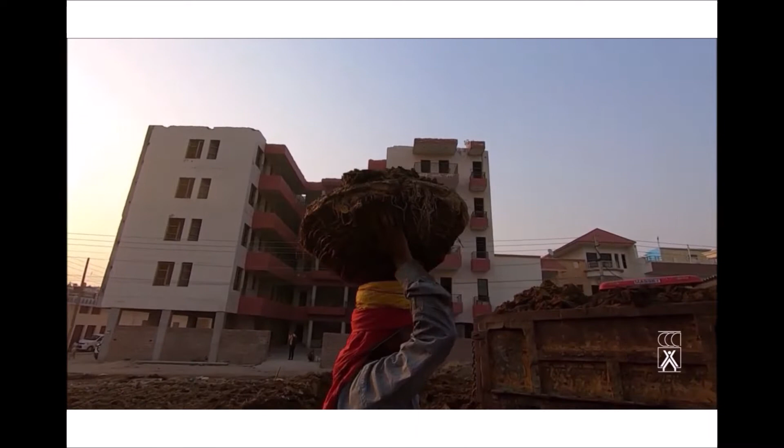One of the various dairy farms in the village. People indulge in various commercial activities. A very prominent cow dung collection area. Cow dung is considered very sacred and used for both cooking and construction purposes.

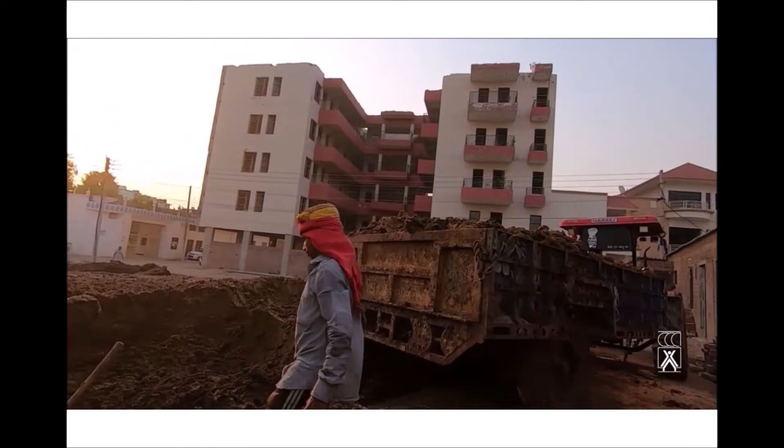We can see the movement across the road, the use of the office courtyard for recreation activities by the children, the local street hawker, right across the pedestrian area, and below the old banyan tree.

Village internal street, we can see the condition of the houses, the movement of the two-wheelers, the pedestrian movement, and the frontage and the projection of the buildings.

One of the laborer settlements, completely temporary construction, and in a very dilapidated condition. The contrast of kacha construction. I'm finding it to be very dense.

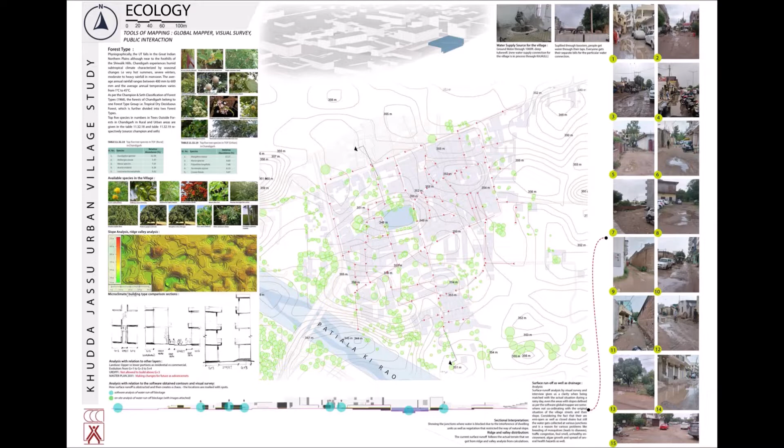Coming on to the history and the evolution of the village. Its name, Khudda, is derived from its terrain, and Jassu is named after the founding lady Jasso, who was quarantined away from the village due to a serious illness during a pandemic in those times. In that period, she cured herself and made a new village which came to be known by her name, that is Khudda Jassu. Since earlier times, Khudda Jassu had a well that was part of a garden made by the Raja of Manimajra, like we saw in the video.

Then is the Nagar Kheda as Shiv Roop for worship and a pond for domestic animals. Coming on to the evolution, first is the establishment of the core. The village started developing along the well, Nagar Kheda and the Anganwadi in the initial stages. The first settlers were the Dhaliwals from the Jat community and their main occupation was agriculture. Then is the second, in 1960, the expansion of the core.

Further settlers were Brahmins, mostly from the regions of Himachal and Punjab, who were Sharmas. Their main occupation was shops and priesthood for different rituals. The expansion reached the established core for the first time after the Brahmins settled as villagers. Then is the second phase of the expansion of the core in the 1980s.

The final main settlers were the Nais, who worked as laborers on the farms or as assistants to the Brahmins. They settled mainly on the Firni or the outer fringes of the village. In the current scenario of the village, one can observe the Lal Dora area is densely built up and therefore hardly has any chance of further development unless it is vertical. Therefore the spillover development is on the fringes and in an organic manner whilst maintaining a coarse texture. We can see the evolution from 2000 to 2020.

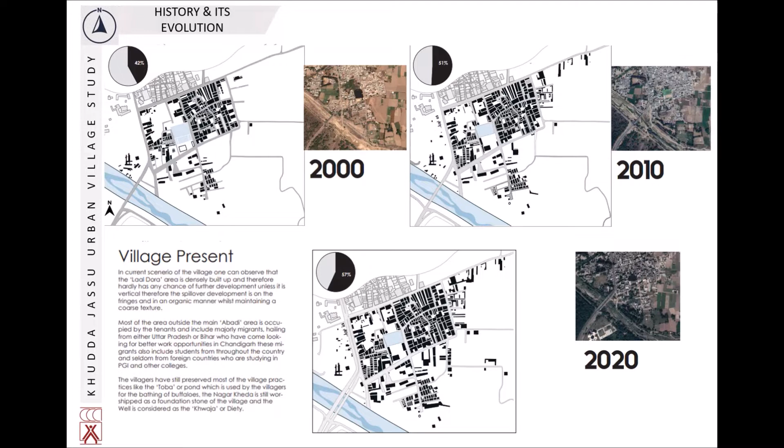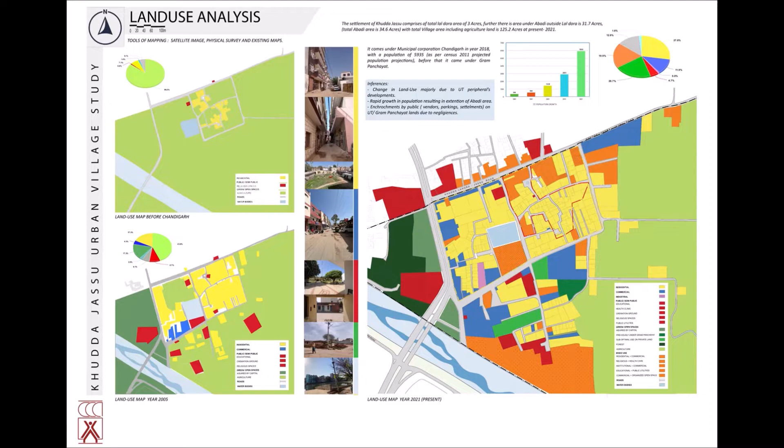Coming on to land use. To understand the land use pattern and sprawl of the village, a comparison is done between different time periods. The main observation is that there is a major increase in residential and commercial zones and a decrease in agricultural area. For analysis of building infrastructure, various parameters like built use, building height, building ownership, age, etc. were taken into consideration. For built use, the percentage of rental and owner is almost the same in residential type, and for commercial, mostly shops and dairies can be seen. For building height, the maximum floor height buildings can be seen in the core area of the village.

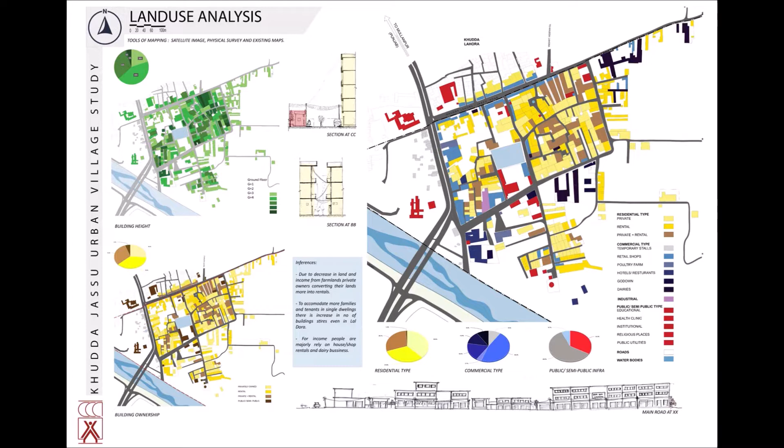To understand the overall grain, texture and pattern of the settlement, figure ground analysis is done, and it is observed that the core area is more densely packed than the outer area and the grain and texture within the core is coarse and uneven.

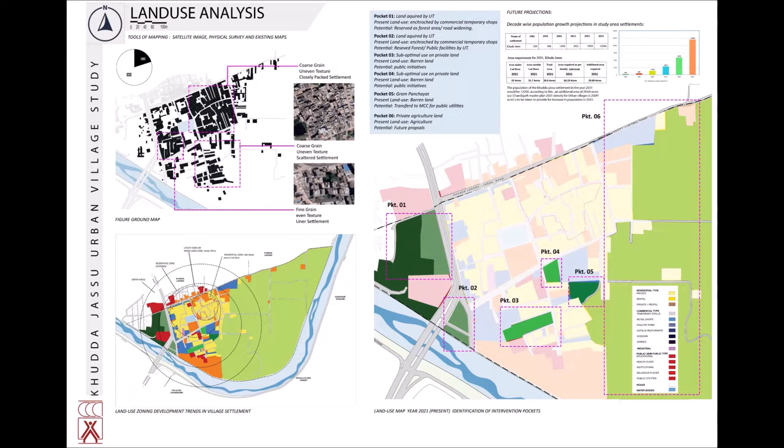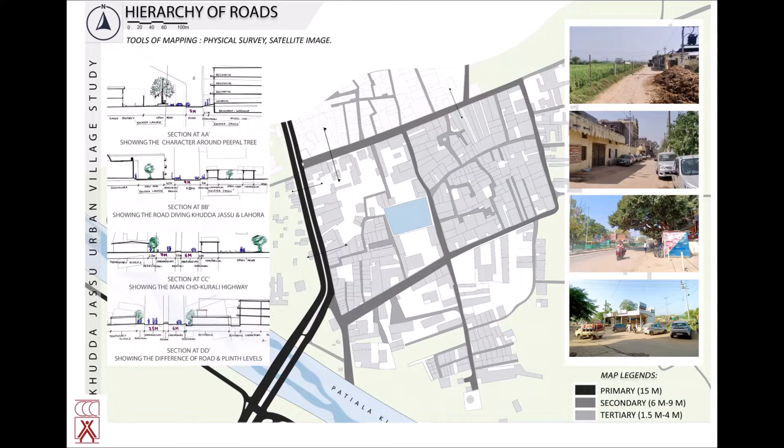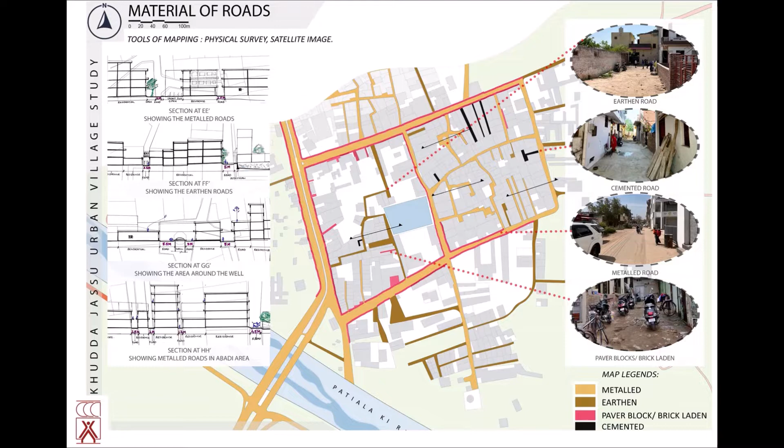Then we'll talk about circulation. Khudda Jassu is the adjoining village to Khudda Lahora. The entry road to the village also marks the division between Khudda Jassu and Khudda Lahora village. This sheet presents the road hierarchy as per road widths. Then is the movement across roads with respect to vehicles, four-wheelers, two-wheelers, cycles, pedestrians and animal movement. Further detailing out the material of the road, whether it is metalled, earthen, paver blocks or cemented.

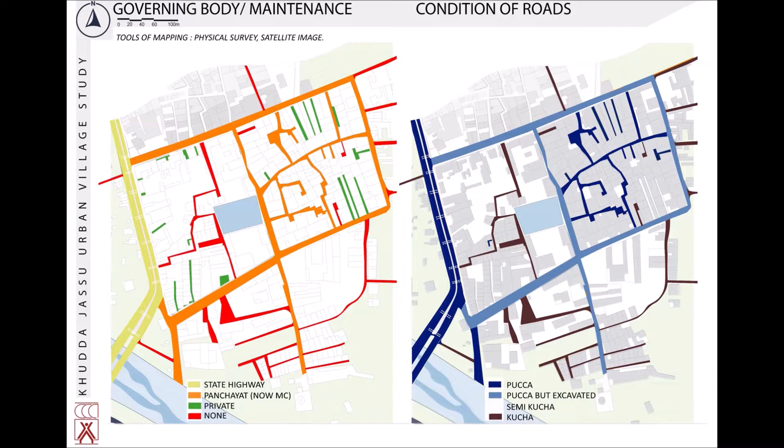Then taking into consideration the governing body, whether the area is maintained by the Panchayat or a private dweller, the condition of the road is monitored, that is, pakka, kacha or semi-pakka. Then mobility mapping shows the origin and destination of the movement of people at inter and intra-village level so as to spot the various points of conflict in the village and monitor the relationship of the village to the city.

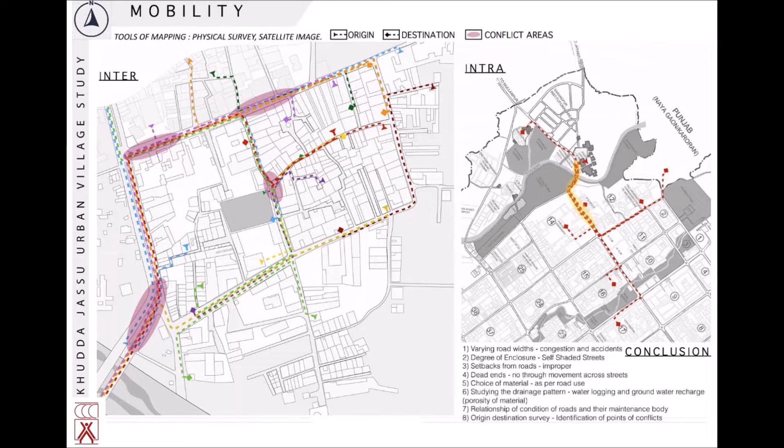Then is the public open spaces analysis. In total, 6 public spaces are identified, divided into 3 categories on the basis of functional use: 3 religious, 2 street nodes and 1 public utility area, and these are inadequate for the communities. For analysis of open space, various parameters were considered like area, vegetation, material, infrastructure, and activity, which age group is using the particular space and when that space is in use.

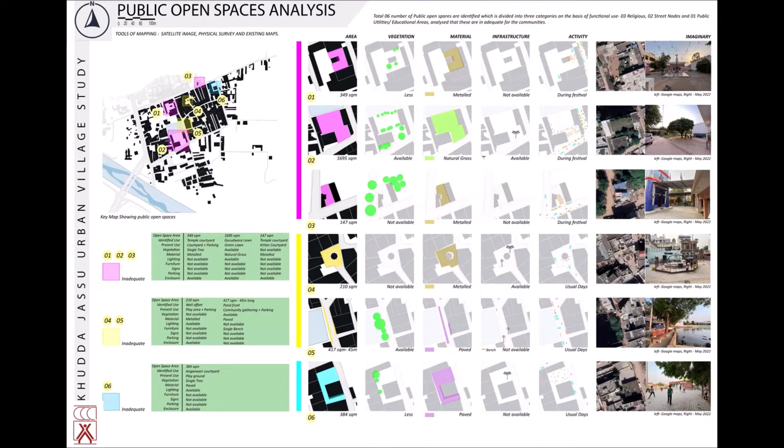The observation made from this analysis is that the village has small patches of open space in different areas, but these spaces cannot accommodate a large population. So there is a need for one big open space where activities like fairs, etc. can take place.

Coming on to infrastructure, according to URDPFI guidelines, all the basic amenities such as fire station, hospital, institutions, etc. are within the 5-kilometer range of the village, but the lack of community gathering spaces and open grounds or parks adds to the issue of lack of refuge spaces for evacuation in case of emergencies. Recently, a water pipeline network was laid to provide water to the residents from the Sector 39 waterworks, but at present the village is entirely dependent on tube wells for water. The village has proper metered electricity supply but lacks street lighting in a few areas.

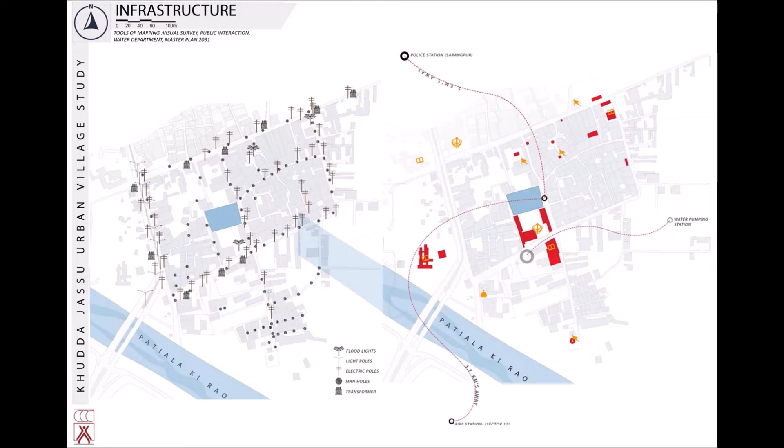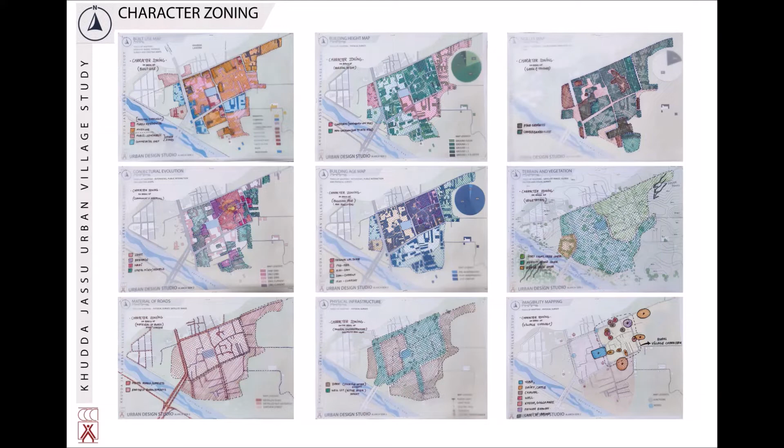Then is the character zoning. Categorizing the village into possible zones by overlapping various layers on the basis of built use, building age, community settlements, grain and texture, building height, density of trees, microclimate, street typologies, physical infrastructure, street enclosure, and village characteristic feature brought us the analysis with the identification of specific parts of the village to be treated according to their needs, strengths, opportunities, and also provide ideas about scope of improvement.

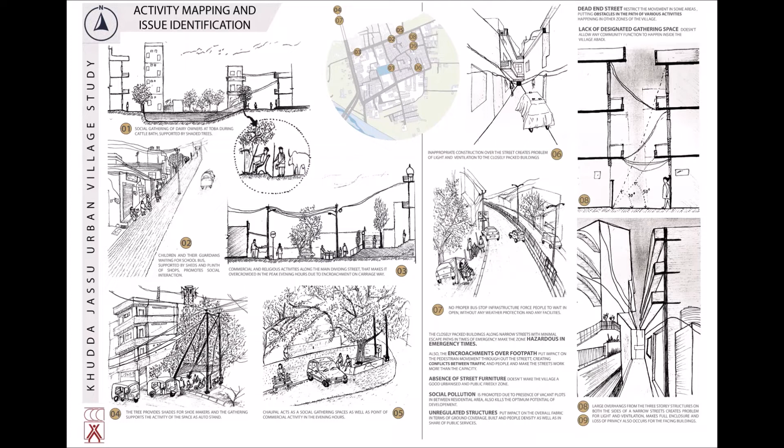While mapping the activity, the identification of the stakeholders, their categorization into subsets of visitors, residents, and administrators, and then mapping down their activities help us to create a daily cycle in the village indicating the most active and inactive time where activities are happening at various pause points and throughout the streets, which can further be classified into socio-cultural and socio-economic subsets. Then further analysis helps us to identify the issues and gives the direction for the development strategies.

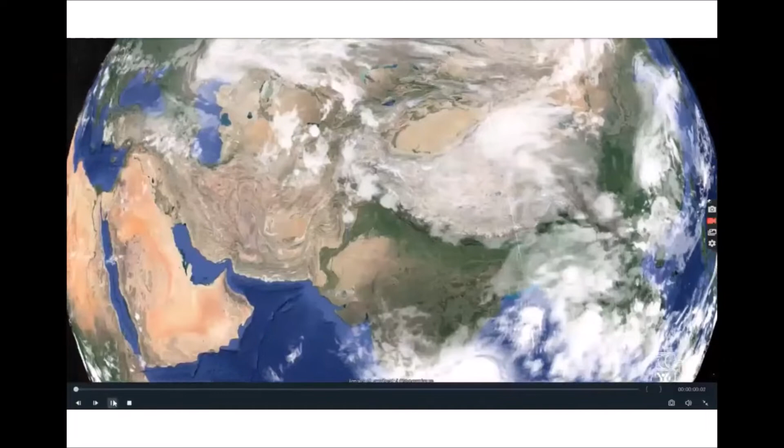Moving on to the next village, Daddu Majra. Now let's have a look at it also. The aerial view of village Daddu Majra. The approach road from the nearest sector. This is the main peripheral road which comes under the extended Abadi area.

This is the Guru Dronacharya Sarovar, which is dried up now and used as play area for children. Again, views of peripheral road. We can see the movement across the road.

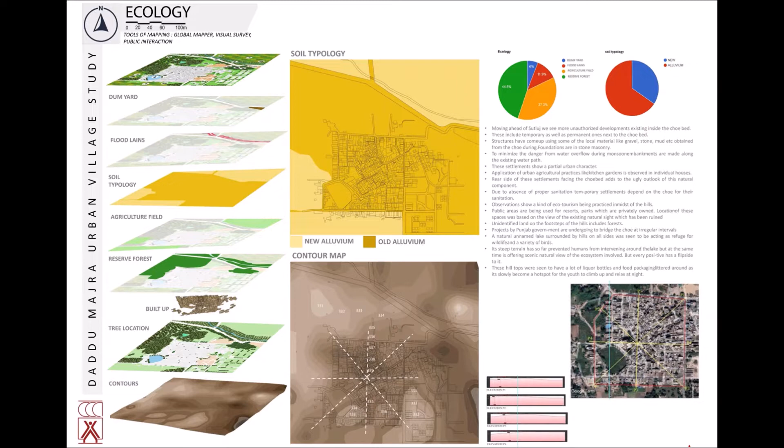This place has groundwater level at 22 meter BGL, which is more than other places of Chandigarh, due to which water scarcity is there. Even the Patiala ki Rao choe water flow decreased due to siltation and more built-up area. Vegetation in this place is less than the surrounding area of the village. The place needs to bring back its natural vegetation and pond needs to be improved.

Talking about the history of the place, it is related to the Mahabharat era. It is said that the Pandavas used to come to the area across the choe for learning Ban Vidya. Here, Eklavya met Guru Dronacharya and requested to be his disciple, but Guru Dronacharya refused. So he erected the statue of Guru Dronacharya to learn Ban Vidya. The statue is now revived and still can be seen within the premise of the Daddu Majra.

In this sheet, the conjecture of evolution of settlements starting from before 1970s to present year. Evolution of settlement is explained with figure ground, road connectivity, land use development with sketches. The sheet explains about how open spaces are reduced to fulfill the increased load of population. The built-ups are placed abruptly on the open spaces, which causes hindrance to the road connectivity that lead to many dead ends. Organic development in Abadi area and linear development in extended Abadi area is observed, stating the piecemeal growth.

Till 1990, the mixed use and the commercial development is observed in the peripheral road of the Abadi area and the residential in the interior areas. After that, the commercial and mixed use development is along the peripheral road of extended Abadi area.

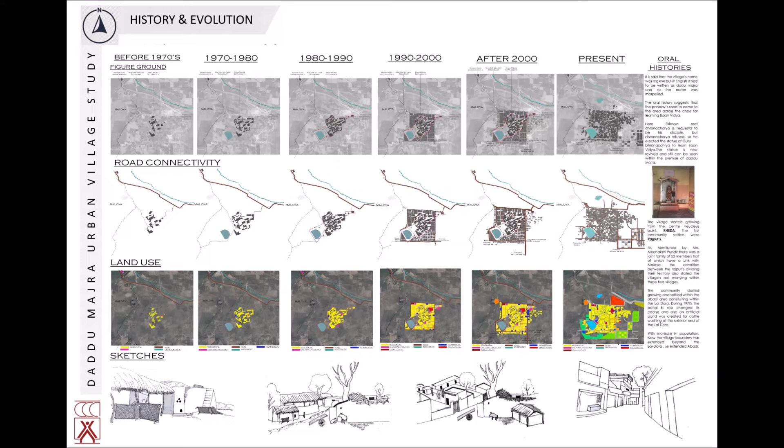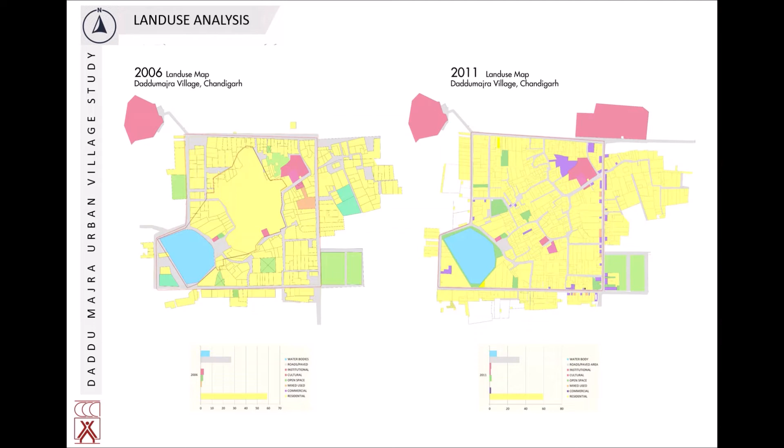Next, talking about the land use of the village. The change in land use pattern can be observed in comparing the land use map of 2006 and 2011. At present, 52% of the total area is under residential. Building structure is old and dilapidated in core area. Residents are constructing new houses from rental point of view without any planning and design.

Commercial area occupies about 4.1% of the total area. People have made shops in front of their houses abutting to roads or streets. The ground floor is used as shops and upper story is used for residential purpose. The area under circulation comes to around 4.2 acres, which is 33% of the total area of village Daddu Majra.

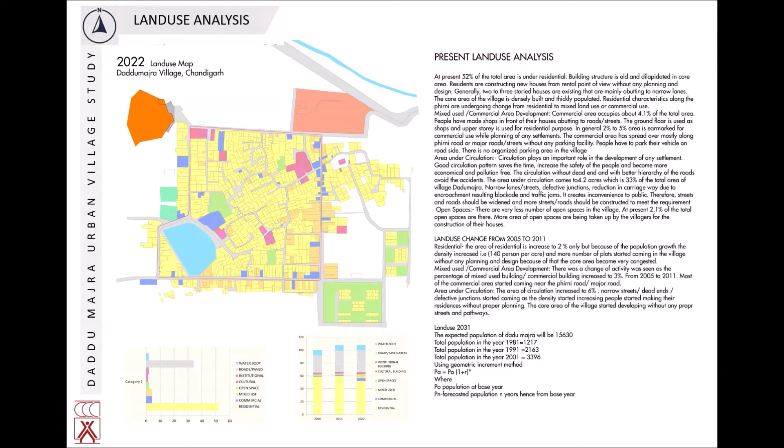Narrow lanes, streets, defective junctions, and reductions in carriageway due to encroachment result in blockades and traffic jams. It creates inconvenience to the public. There are very few open spaces in the village. At present, 2.1% of the total area is open space. More open space is being taken up by the villagers for the construction of their houses.

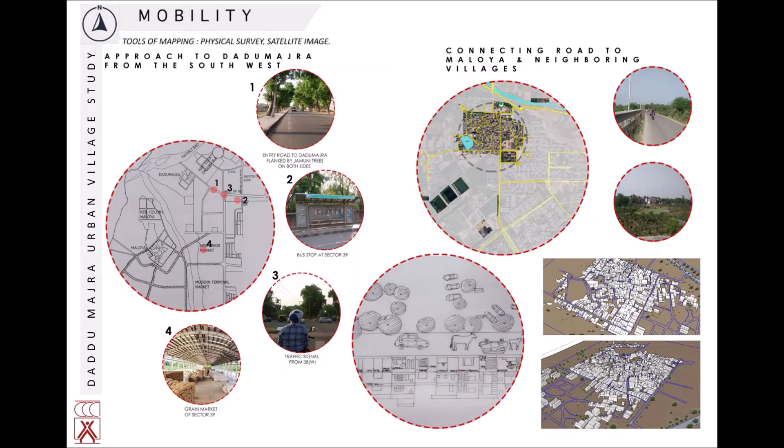Next, talking about the circulation of the village Daddu Majra. The sheet is about the dependence of commuters from the city and neighboring areas on Daddu Majra road for travelling to and fro. The network of roads along with the material typology is shown. The street pattern has developed in response to the peculiar nature of joint family clusters, which at times wind up in a dead end.

The last mile connectivity and location of the nearest bus stop from the village. The pedestrian nature of internal streets and pathways and increasing vehicle inaccessibility due to narrowing of internal roads. Open spaces help us understand the relationship between space and activity. With the comparison between figure ground and Nolli map, it can be concluded that including the road and public spaces, 68% of the total space can be used freely by the public.

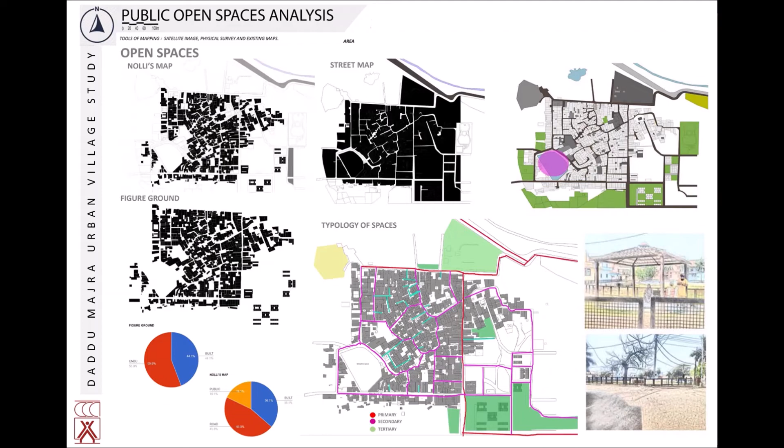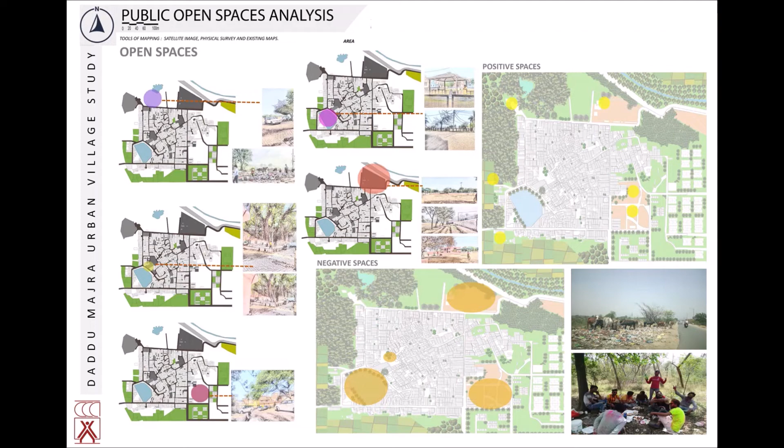The space can be categorized into three categories: public, semi-public, and private, among which the Sarovar is the largest open space in the village. Then there is the location of space with respect to activities like the Sarovar, Dronacharya Stadium, Heritage Tree, open space being used for parking near the main road, etc. Followed by typology of space with respect to ambience. Then a route has been carved which takes a person through all the different hierarchies of space in and around the village, followed by the footfall of different age groups in these respective areas.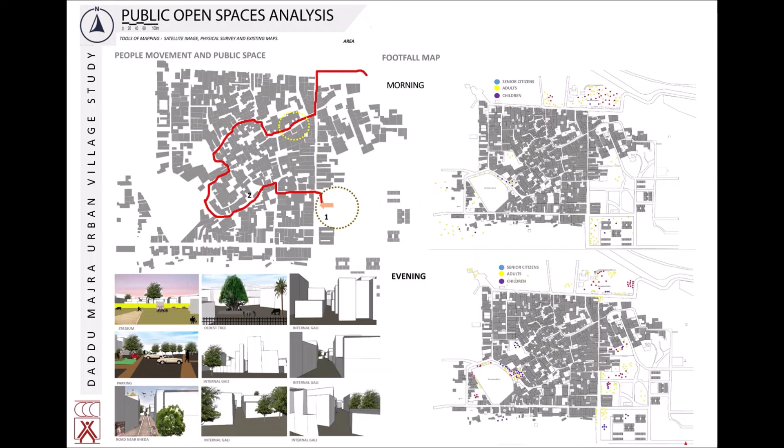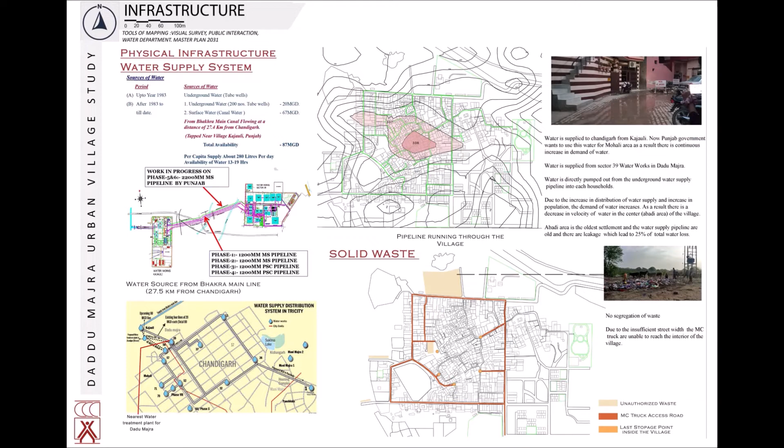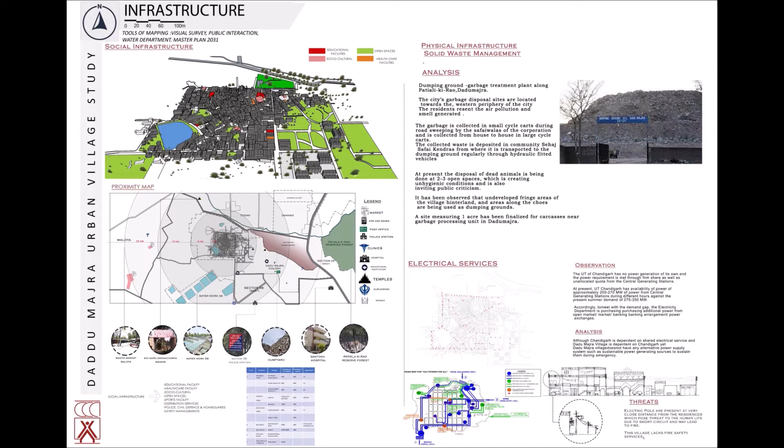Next, talking about the infrastructure of the village, physical and social infrastructure is considered. URDPFI guidelines have been referred to for studying and analyzing the infrastructure. The physical infrastructure includes water supply, solid waste management, and electrical services. Physical infrastructure, from the main source to distribution to each household, is explained along with the related issues. Social infrastructure includes educational facilities, healthcare facilities, socio-cultural facilities, open spaces, sport facilities, etc. Proximities of the social infrastructure are shown considering diameters of 3, 5, 10, and 15 km.

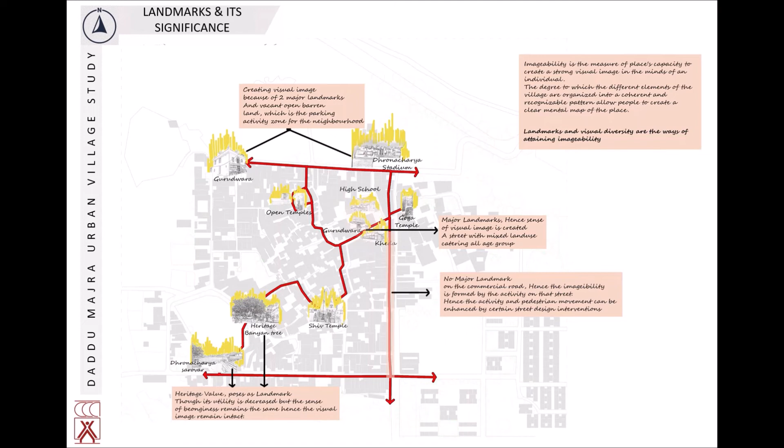Next, talking about the activity pattern of the village. Any village character is defined by its activities, in terms of occupation, recreation, religious, commercial, social, etc. The village Daddu Majra has various zones defined by activity, like the major commercial street, the historical tree with a chopal for community interaction, a sarovar which had great importance in the beginning stage of the village's evolution, which has now dried up, the Dronacharya Stadium used for recreation, and various religious landmarks of various communities.

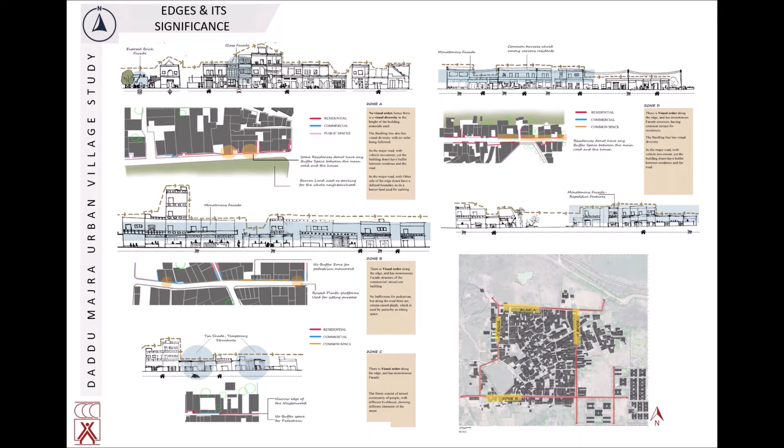The village has various dead spots due to criminal activities, lack of urban infrastructure, etc. Through the study of nodes and edges, we understand the close relation of villagers; they have good social contact and communal relations. Hence, they have a sense of shared resources and space for community activities. The central Abadi area has dense population, and hence the grain and texture of the village vary from the periphery to the core, leading to certain junctions being active and certain junctions being problematic and inactive.

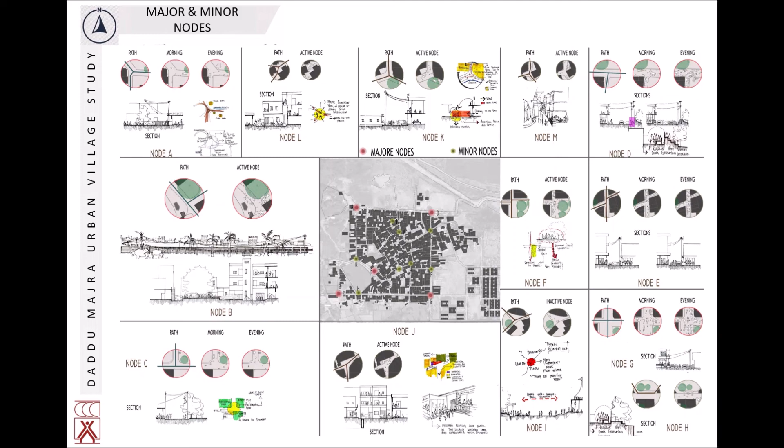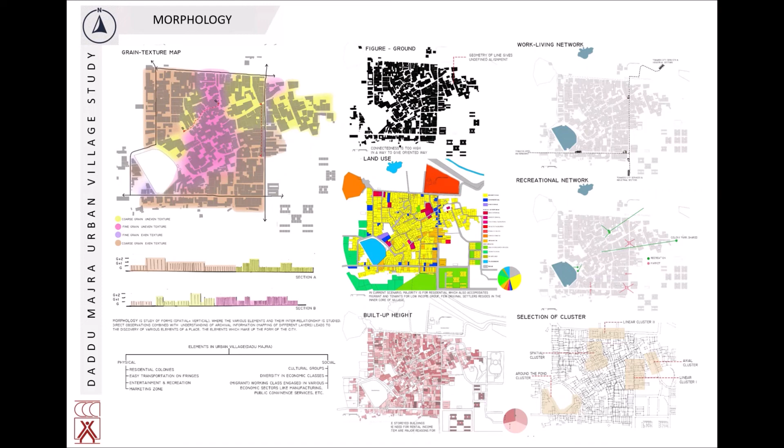Talking about the morphology of the village, the sheets talk about the grain, texture and form of the urban village. Different layers have been superimposed to find out the overlapping areas. These areas are divided into clusters for finding out the different driving elements that make up the whole village, such as intellectually stimulating places, community and their self-interest, and so on.

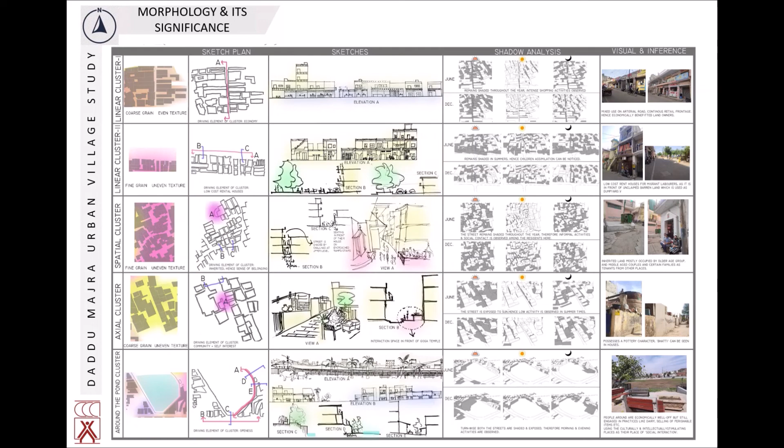Change of ownership, which is quite evident from the land use. Hindrance in thoroughfare across the streets, across the villages. We have various dead ends, no cul-de-sacs. Then is the major congestion at the entry of the villages, acting as the major junction or node. Then is the lack of maintenance in water supply and sewerage lines. Lack of community gathering spaces, like we saw while analyzing the open spaces of the villages. Then there are certain inactive zones bounded by major nodes. Then we can find various male-dominant spaces in the villages.